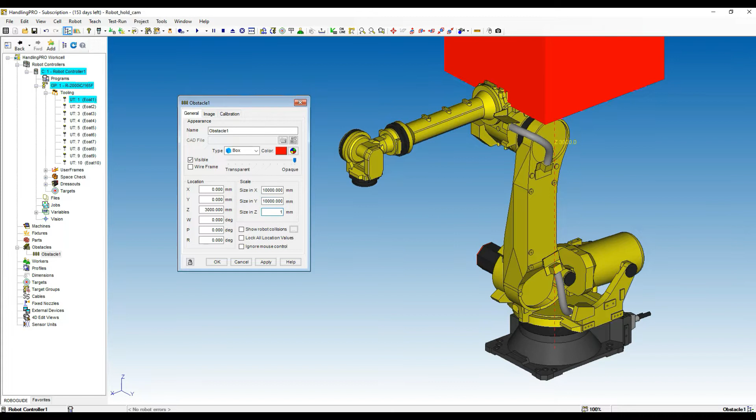Now, add the base plate for our robot. Remember to change robot height according to base plate thickness.

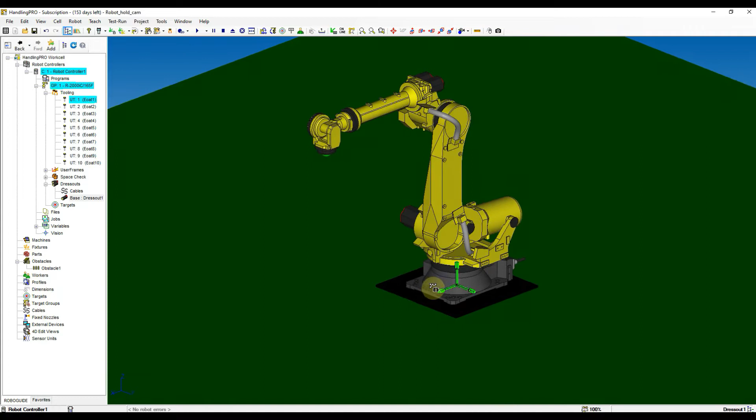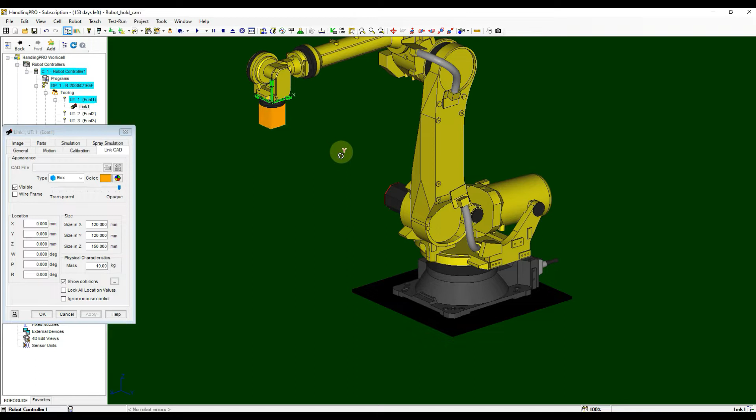We need to reserve some space for the camera to mount on robot end effector, so, select Add Link from the UT1 and then select Box. After that, set the size and location. Tune the size of box slightly bigger than the flange.

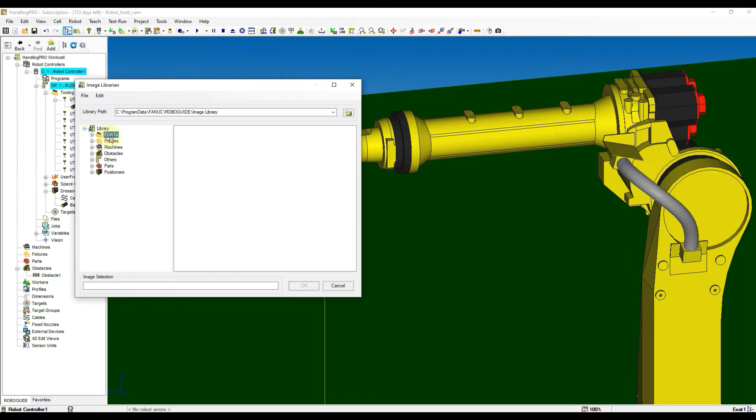Add link at UT1 again and then select CAD library. From the menu list, select pointer. Change the location of the pointer CAD to attach at the end of the box.

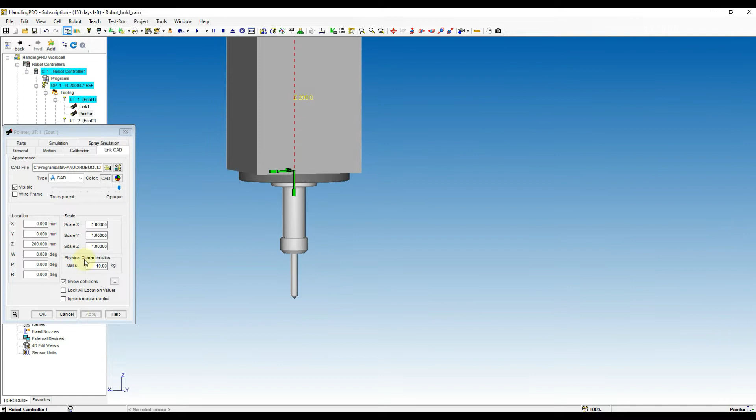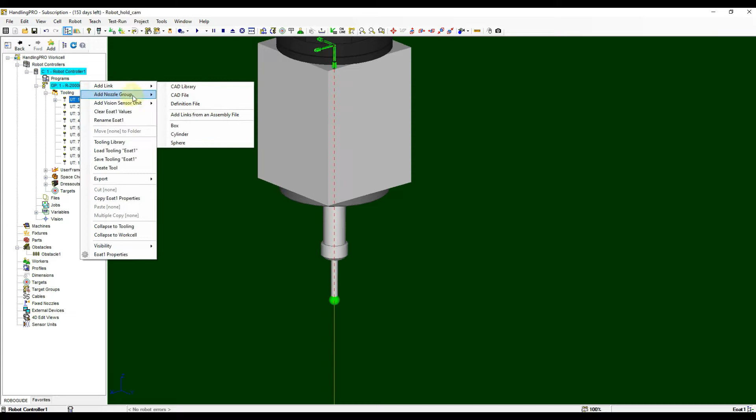Now, enable the vision simulation from the vision menu at the cell browser. Right-click to change the properties. After controller rebooted, go to UT1 again and right-click. Select Add Vision Sensor Unit option, and then, Add 2D Camera and then CAD Library. Select the same camera.

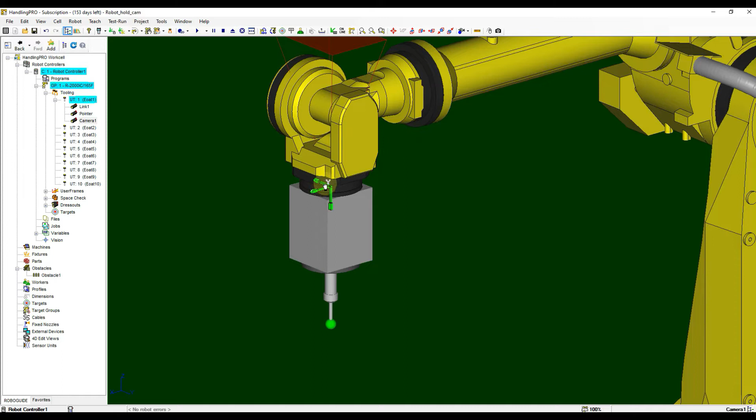Move the camera CAD to correct orientation with the triad. Round off the imperfect values and then move the camera to near to the position we want. Use the measurement tool to move the camera to attach to the EOAT link.

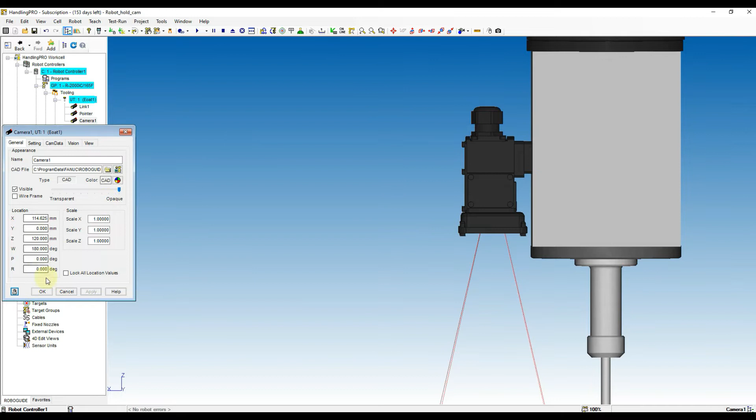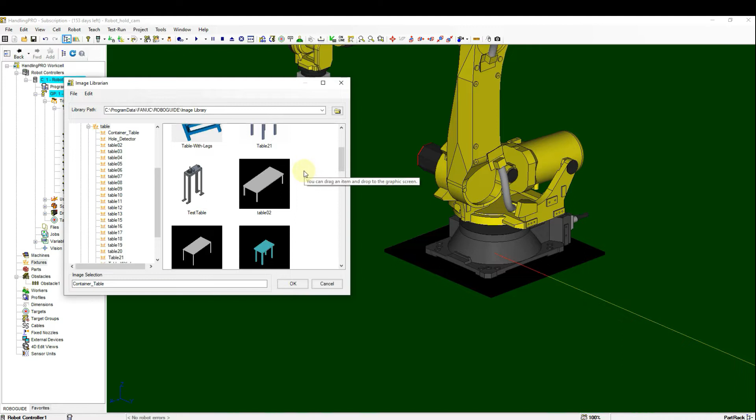Add fixture to the work cell with the fixture menu at the cell browser. From the Image Library menu, select Table menu and then select the table accordingly. Change the table location and size now.

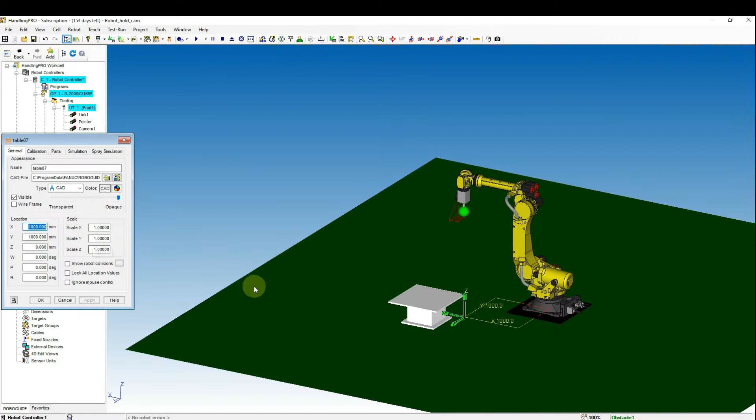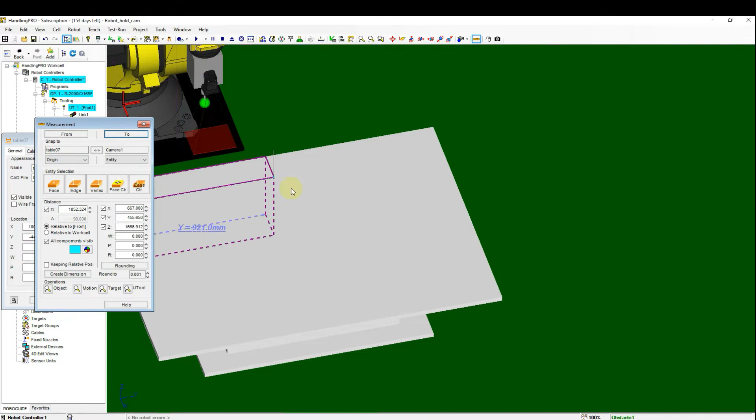The size of the table was set with the scale value. We have to measure the table actual size ourselves so that the location of table center can be put nicely at the covered range of the robot working zone. Now, set the location coordinates of table to center of robot.

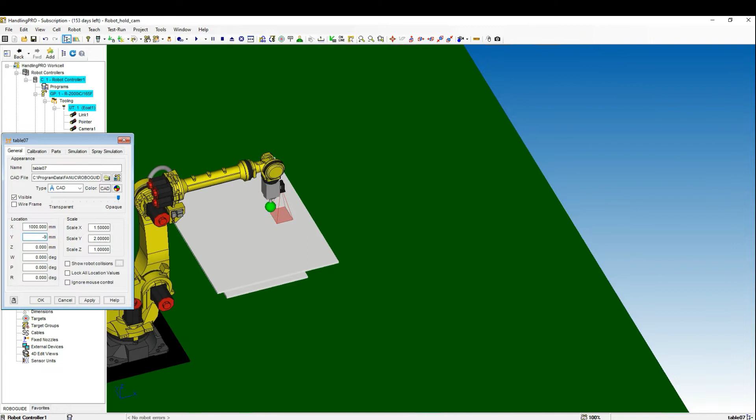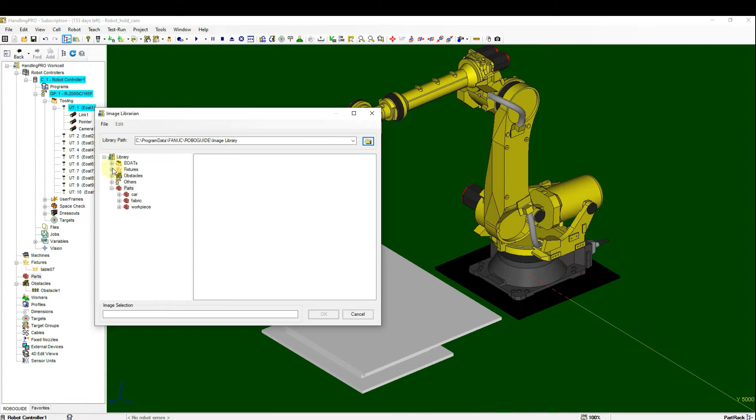Add the calibration jig as part to the table and then locate it to the top surface of table. Add another part to the work cell with box. Then change the name to glass panel. Set the size accordingly.

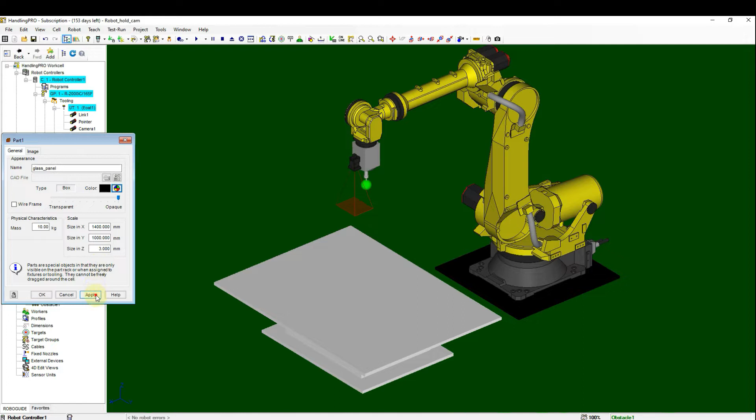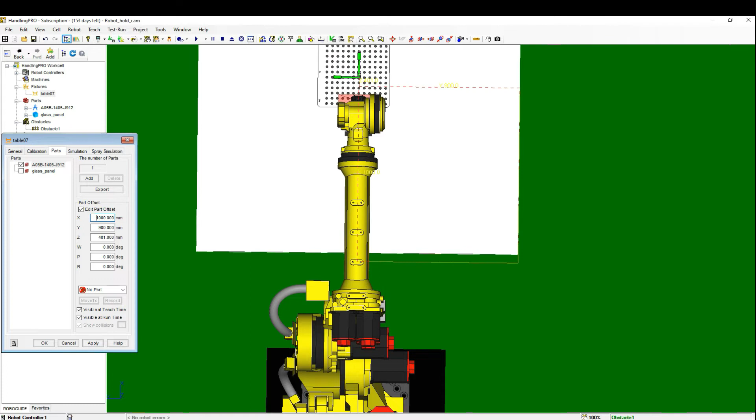Double-click at the table and then select Part tab to add part. First, set the calibration jig to slightly higher than the tabletop. Then move it to Robot Camera View Center. We can check the camera view with the View menu bar and then select Camera View.

Now, go to the cell browser and then select the Vision menu. With the General tab, click the port 1 and then select Device to map to it. From the top menu bar, select Robots menu and then select Internet Explorer option. Click the Vision Setup button and then create the camera data.

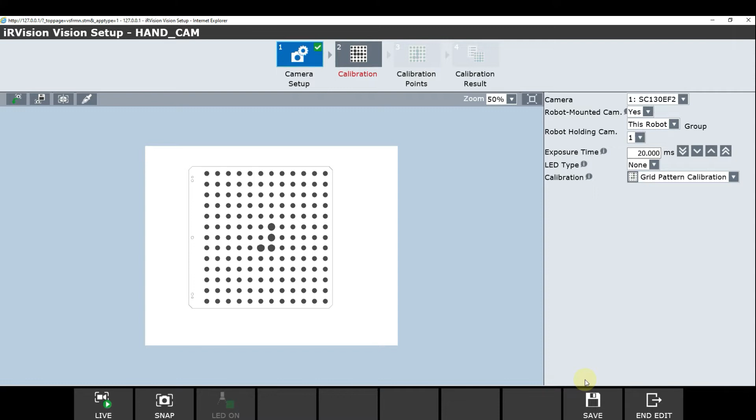Set the camera and then choose Yes for Robot Mounted Camera option. Then change the calibration option method to grid pattern calibration. Temporarily save the data. Now move back to the Roboguide screen.

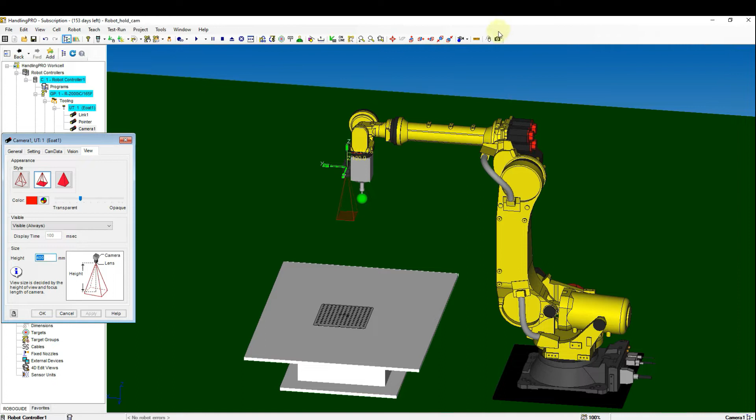Now, open the camera properties from the UT1, and then select the Setting tab. I do like to change the focal distance to 16 mm for more detail image. After that, go to View tab and change size to 1250 mm, and then, visible setting to only when snap is done.

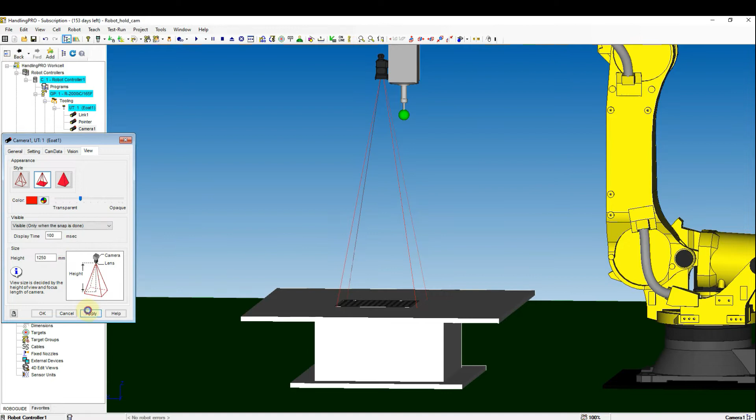Open the Teach pendant and click a menu button. Select IRVision option and then select IRVision utility. From the utility screen, choose the automatic grid frame set. Set the group number as 1, and then keep the user frame and user tool number as we are using the empty frame. Change the camera name to the camera we connected to robot earlier. After that, change the grid spacing value to 30 mm.

Record the current position as start position. If we need to confirm the current recorded position can fully view the calibration jig, click the Display Image button on Teach pendant screen and click Find button to check the image result. After confirming all settings, move away cursor from start position setting, hold down Shift button and then click Execute button.

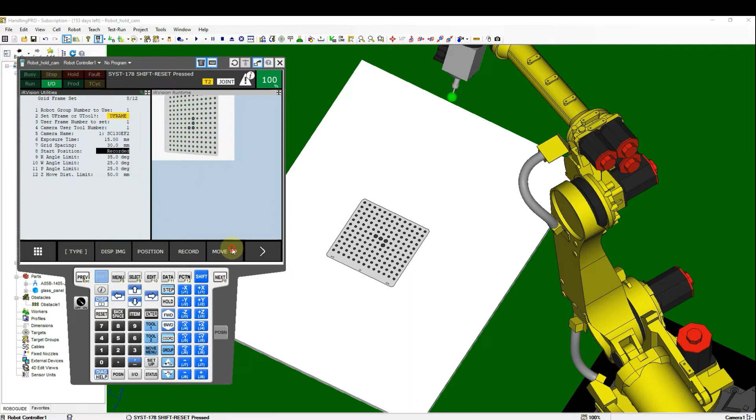If we find the alarm as position not reachable or axis limit, we need to reduce the WPR angle limit. Reset the alarm and move robot back to start position then execute again. When dialog showed, select Restart to continue.

Robot will move for 14 procedures to confirm the center point of calibration jig and camera center point. After completion of procedures, user frame and user tool data will be overwritten by robot automatically.

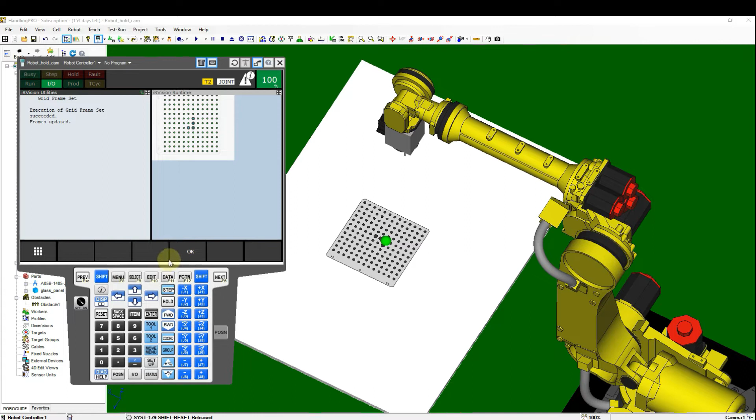Now, please copy UT1 setting and then paste at UT2 as we need UT2 to set the tool center point at sharp tip. Change the UT2 tool center point accordingly.

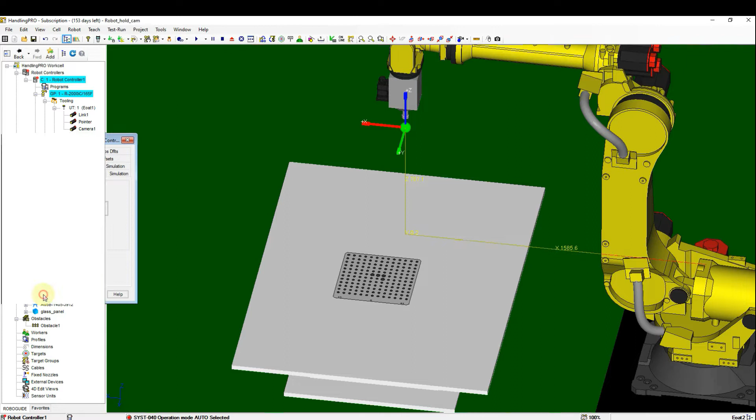Open the Internet Explorer again, and then, click Edit button to enter the camera data. Go to Calibration tab and set the parameters accordingly. Move the square to cover as much as the full circle dot.

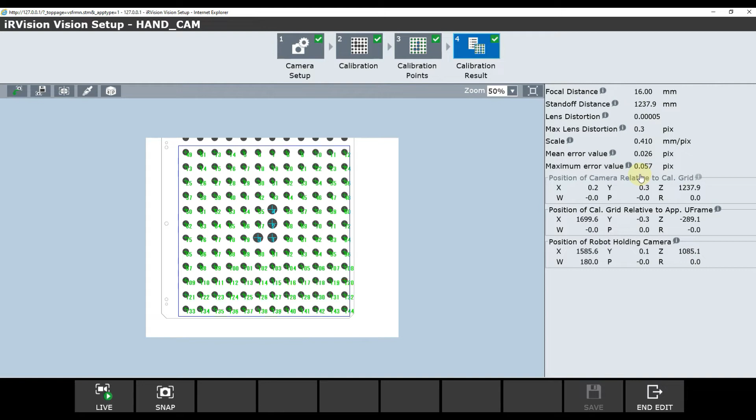Now, our calibration was completed. Don't forget to save it. We can check the calibration result at the Calibration Result tab. Now, back to Roboguide, add the glass panel to the table fixture. Set the location accordingly.

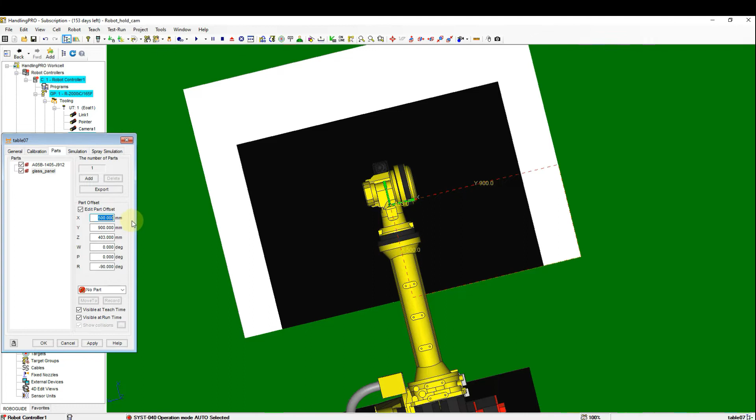Create a program and follow my step to add on the instruction. If you could not follow, please have a view on my basic tutorial video.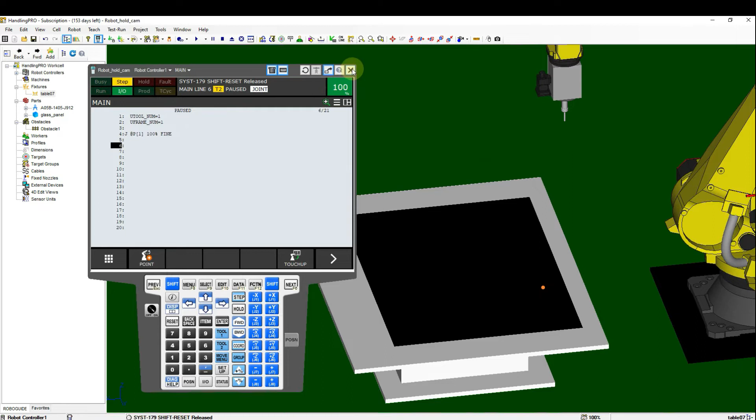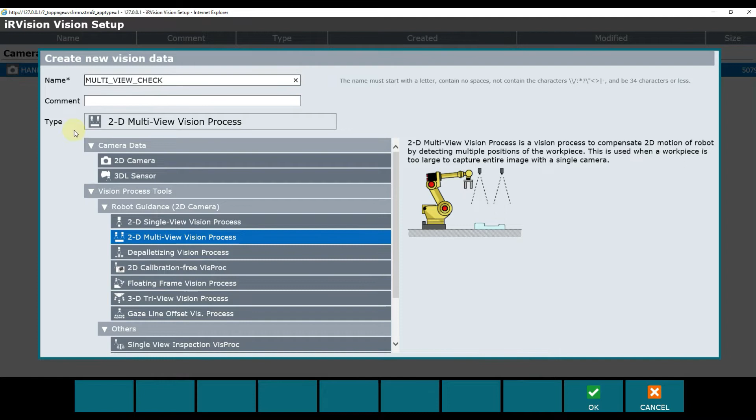After done from creating program and home position, please back to Internet Explorer and click Create button. Select 2D multi-view vision process from the list. Input a name for the vision process. At the 2D multi-view vision process menu, set the offset mode and offset frame. Others item please remain and will set up later.

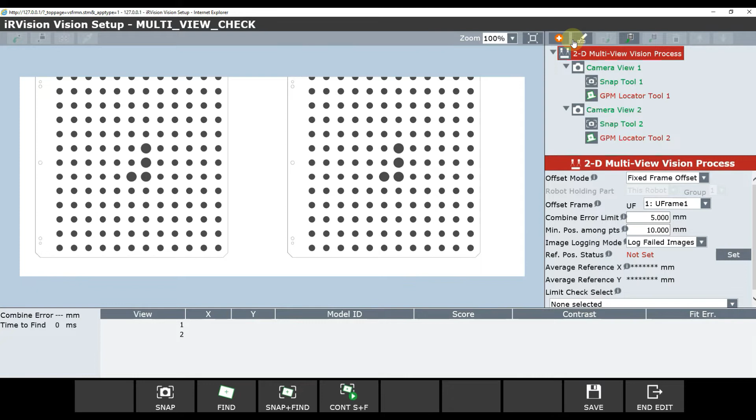Go to camera view 1 and set the camera data we created and calibrated just now. Repeat the same thing to camera view 2 and 3. Move selector cursor to 2D multi-view vision process menu and then click Add button and then add camera view 3.

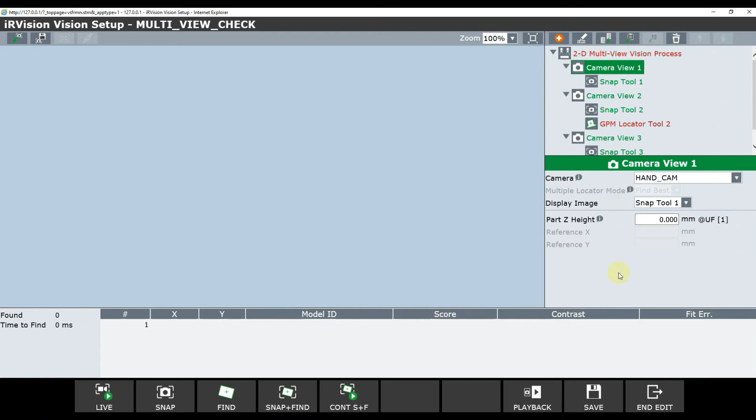Default vision process for camera view is using GPM locator tool. But our workpiece is not suitable to use this tool. Please delete all camera view GPM locator tool. Now, select the camera view 1 and then click Add button. Select combination locator tool from the list and then click OK. Repeat this step for camera view 2 and 3.

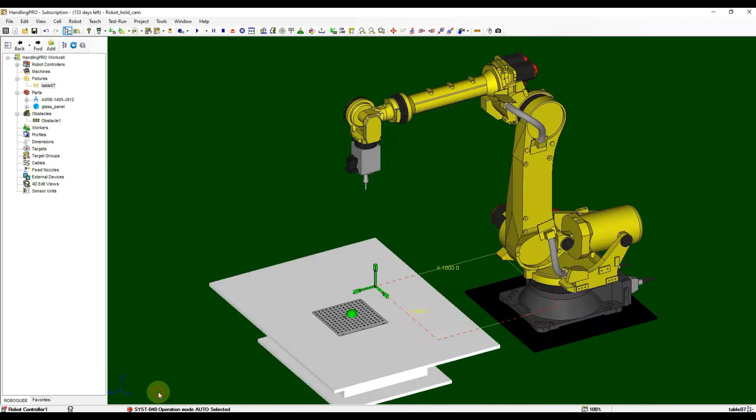Back to Roboguide screen, go to View menu at top menu bar and select Camera View from the list. Switch to top view of workcell, then click at the Teach Tool selection button to show the jog triad. Move the triad to the top left corner of the workpieces. After that, turn on the Teach pendant and confirm the user tool number and user frame number are in correct number, and then, record the first snap position in the program we created just now.

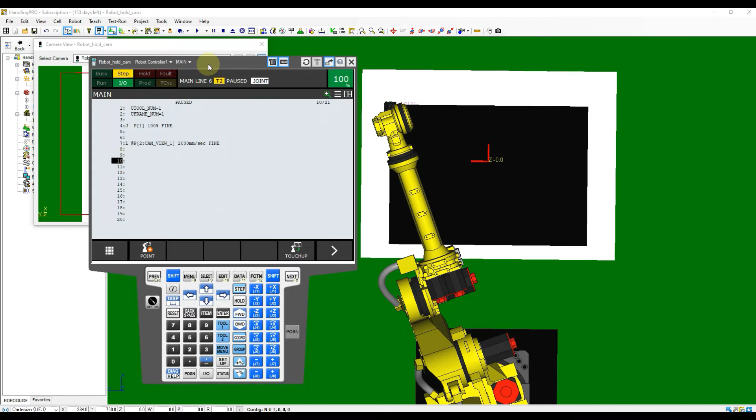Repeat this step to bottom left corner and bottom right corner of the workpiece. Please make sure you make some reserve lines at the bottom of the snapping points.

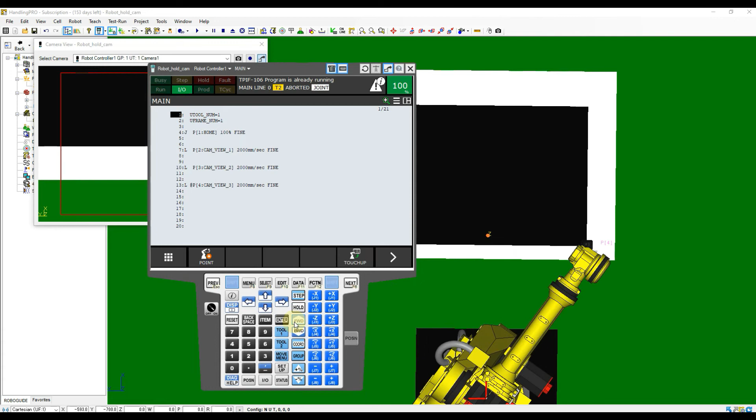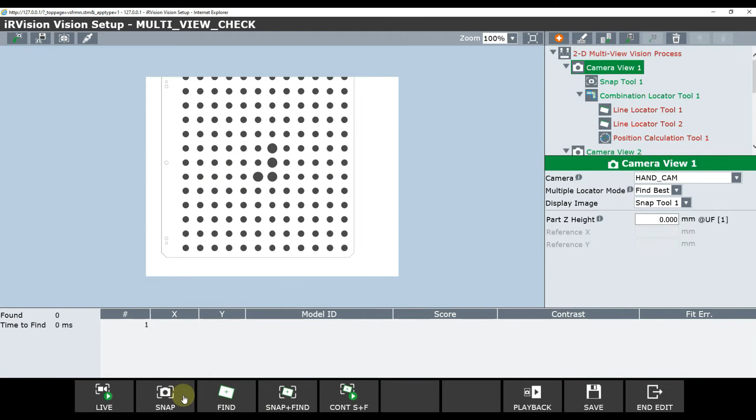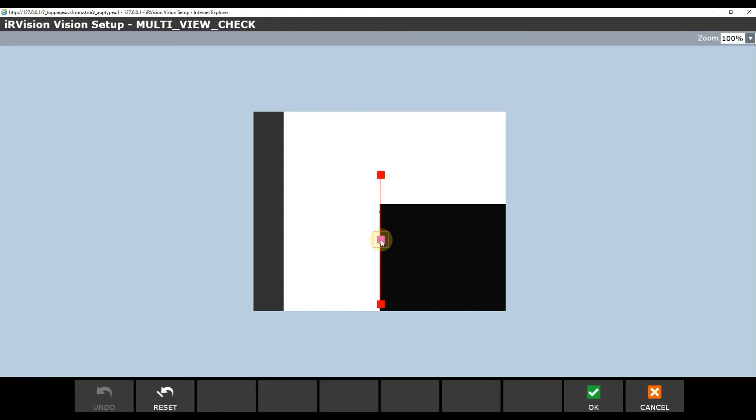After completed the position touch-up, move the robot with the program to first snapping point. Open the Internet Explorer again and then select the camera view 1. Click the snap button to update the image. Then, select the line locator tool 1. Click the Teach button at the list below. Drag the line to one of the edges of the workpiece and align it nicely. Click OK to complete the teaching and continue.

Select line locator tool 2. Drag the line to another edge of the workpiece image. And then click OK. Now, click at the Position Calculation tool 1. Set the locator 1 and locator 2 to the line locator tool number. After that, click at the Combination tool 1 and then click Snap plus Find button to verify the teaching.

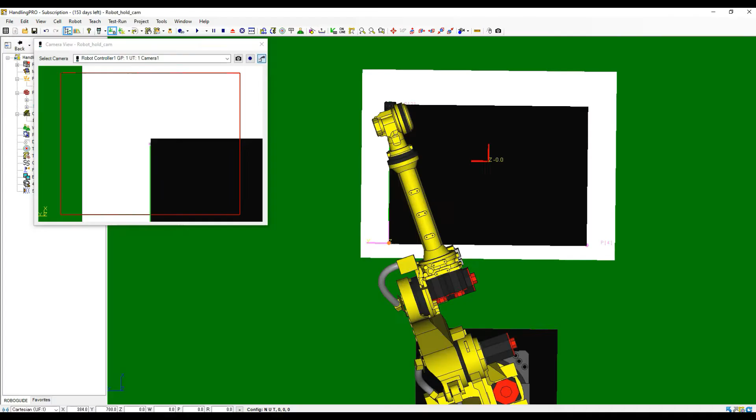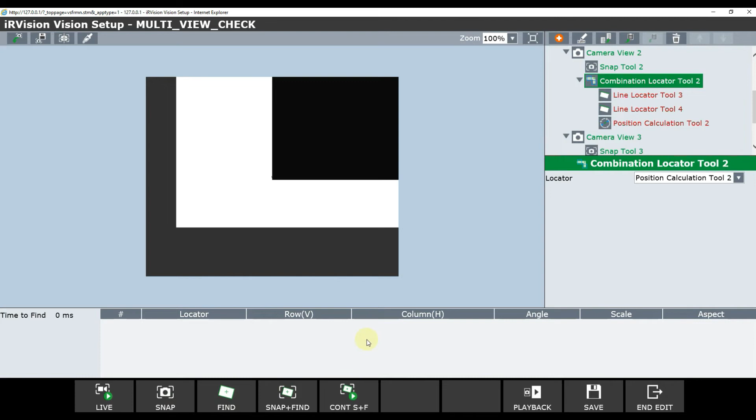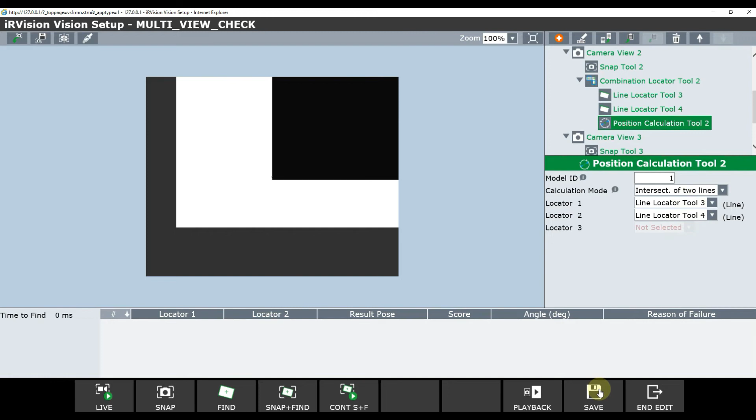After complete View 1, select Camera View 2. Back to Roboguide, open Teach pendant again and move to the second snapping point. At the Combination Locator tool apply the same method from previous setup and continue to Combination tool 3. Repeat the steps again at Combination tool 3.

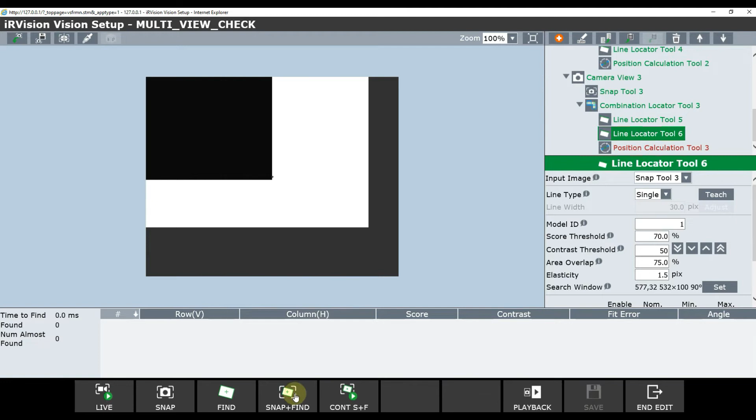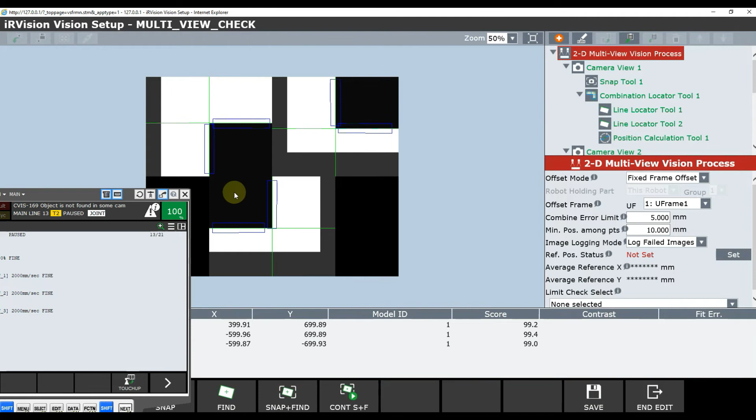After completed all locator tool teaching, click at 2D multi-view vision process. Click Find button if all 3 images showed on left. Find result success, click the Set button at the reference position status, and then, save the data.

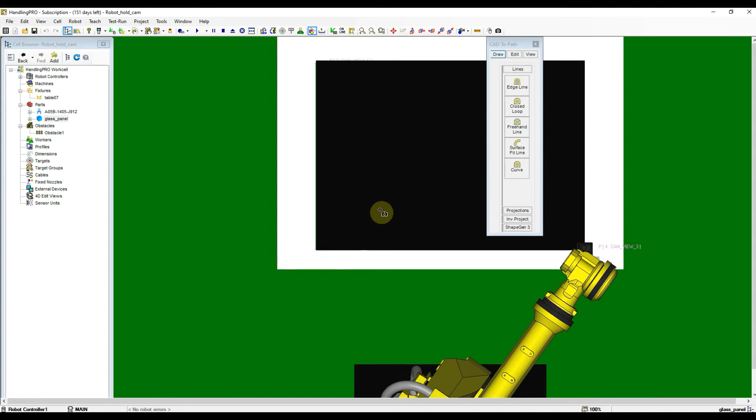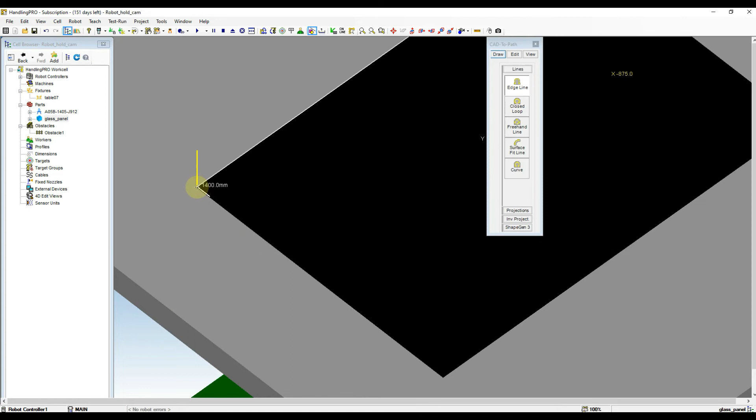Back to Roboguide. Go to Cell Browser menu and expand the Part menu. Right-click at Glass Panel and then select Draw Feature option from the list. Click Edge Line from the pop-out toolbar, and then start to plot the path on workpiece at Part Track. Double-click at the end of edge to complete the path plotting. Confirm the path at the correct edge.

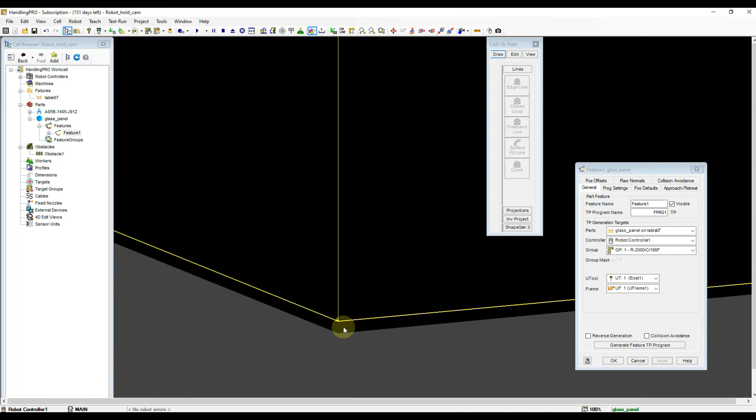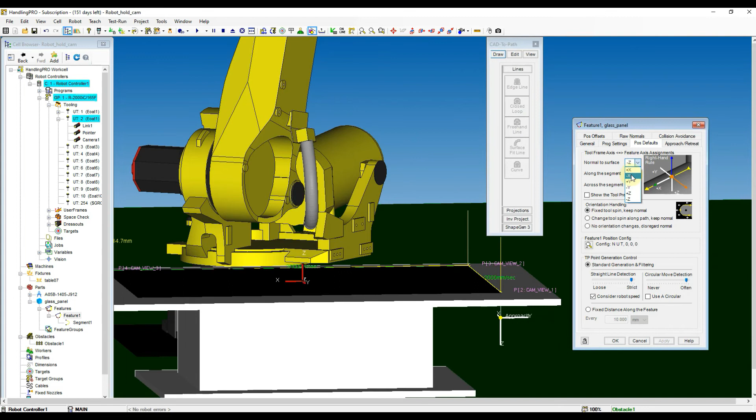Now, move the view to the front of the table. We found that the orientation of triad created by the Draw Feature does not match to Robot Tool orientation. So, please select Position Defaults tab, and change the normal to surface, and along the segment accordingly. Turn on the Teach Tool selection of User Tool number 2 orientation to reconfirm again.

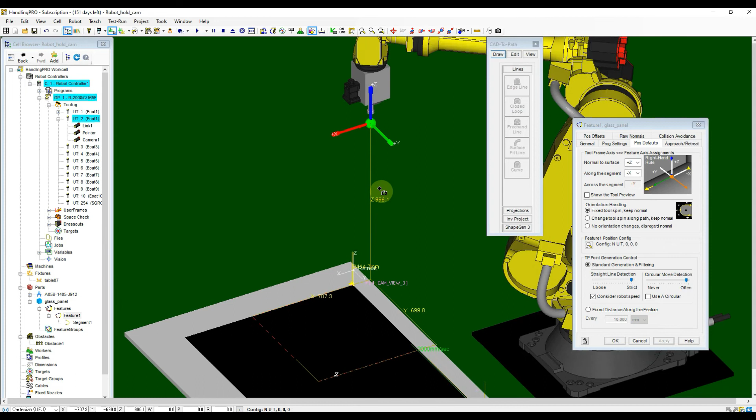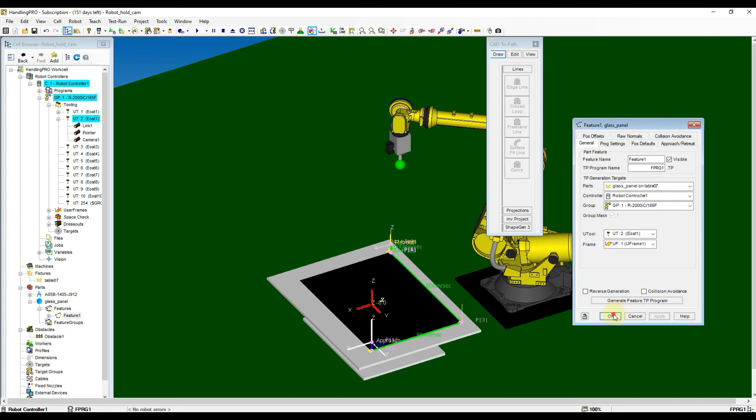Now, go to General tab of the feature number 1, change to User Tool number 2, and then click Generate Feature TP Program. Now, we can see the generated program showed in the Teach pendant. Open main program to add on camera snap instruction for each point.

After done 3-point snap instruction, use get offset instruction to calculate the offset position of the latest image. Continue to input the program accordingly. Create the error branch label when the vision failed to detect the workpieces.

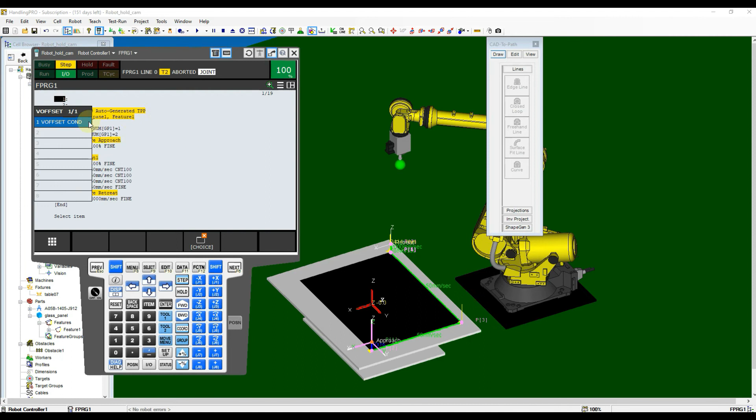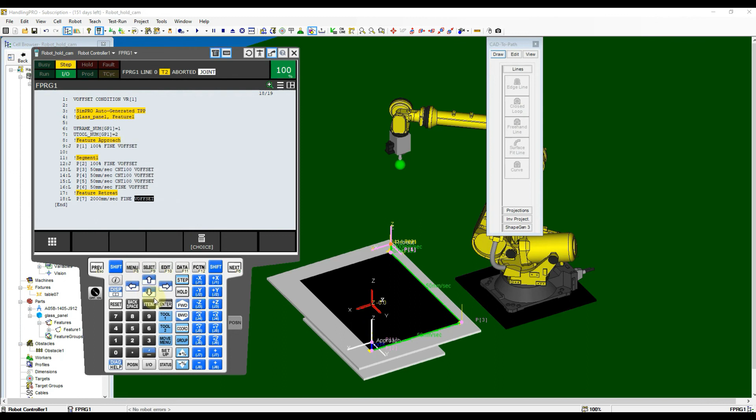Now, we modify the generated program from Roboguide. Insert the vision offset condition instruction, and then add additional motion instruction of vision offset at every single point. Back to main program, and then, add the home position after the path motion. Remember to change the user tool number to 1 as home position is using user tool number 1.

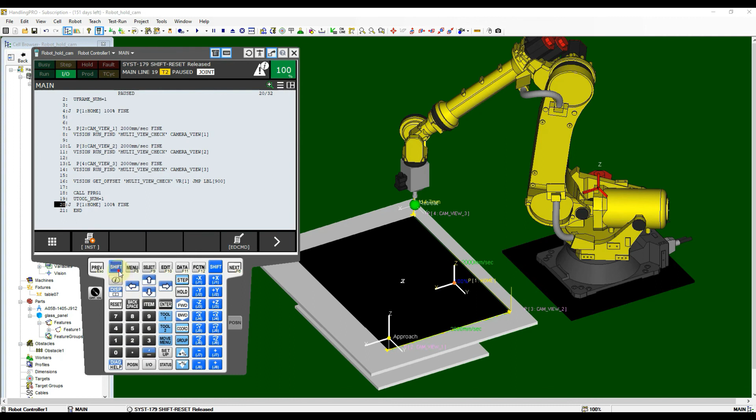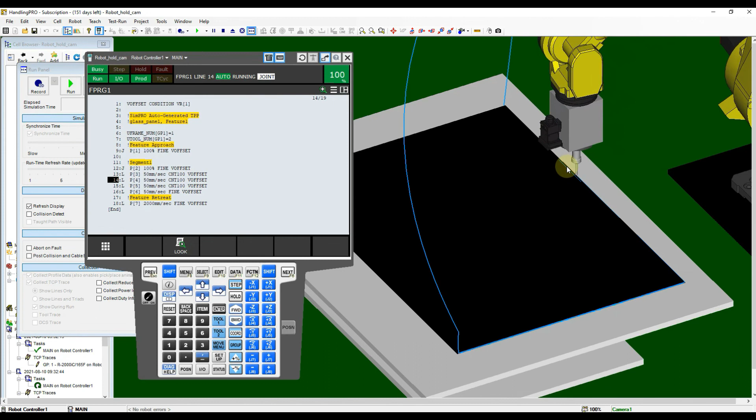Now, we can try out our program, with click Run button at top icon bar. After tryout without offset the workpieces, now manual adjust the R orientation of the glass panel. Then test out the program again. Carefully monitor the TCP path lines.